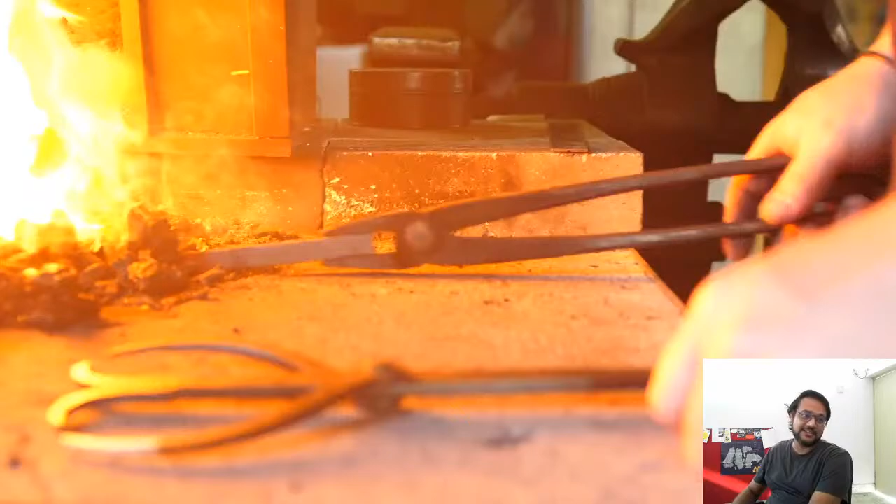I found this on Vimeo, and it's really interesting. I'll do some voiceover on top of this. It's really well shot, so I thought, why not show you guys and discuss it with you as the video is going on? This guy is making something quite interesting, and I think it will blow your minds by the end of the video. But take a look at how he does it. That's the important part from the perspective of this course.

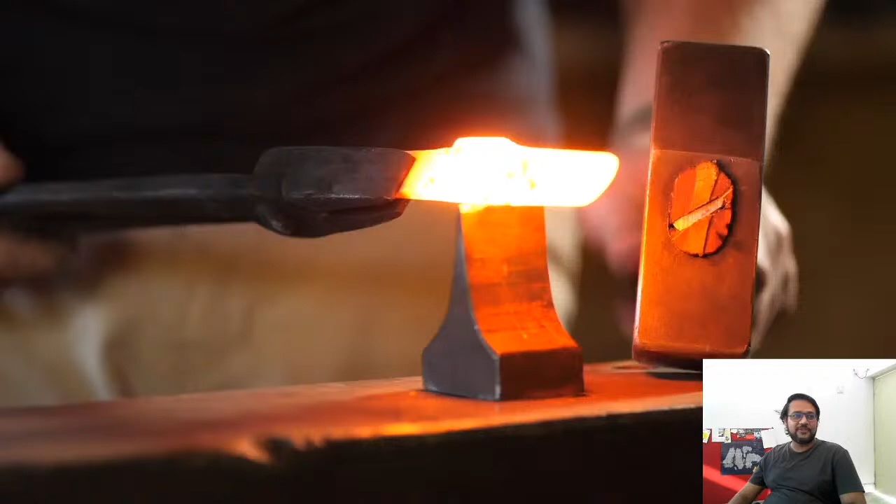So you see what happens when you heat metal? It gets red hot, and at portions where it is really hot, it gets almost white. He's working with steel mostly.

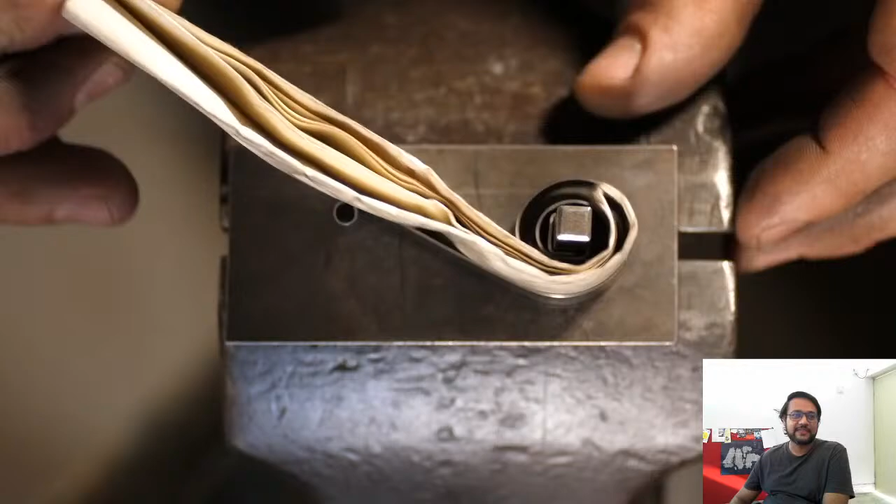So he's trying to make a spring. He's bent a piece of sheet metal, wrapped it in wire, coated it with a kind of chemical. I think it's borax. It's a kind of flux which prevents the metal from oxidizing too much. Okay.

Yeah, totally, Madhav, editing is amazing. I mean, it's edited to the music.

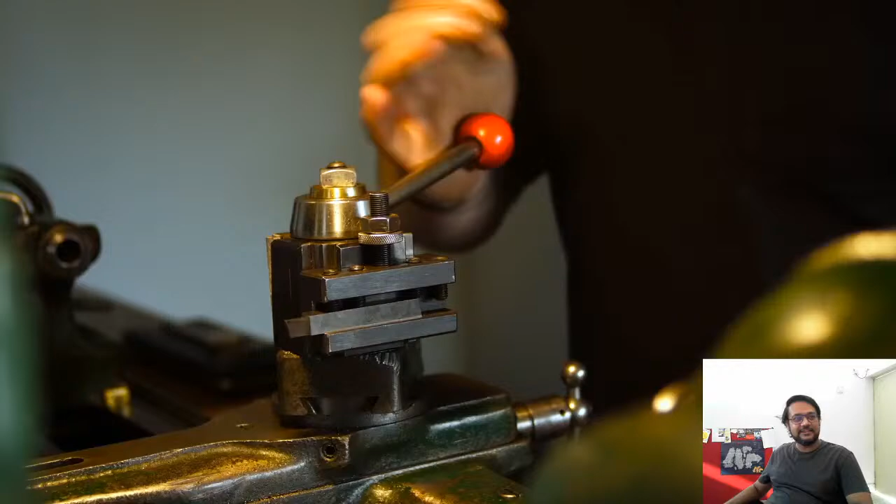You saw he dipped it in oil after he did that, and now he's taking it into the various machines and machining out some interesting shapes. The guy is so good that he's making his own screws. Can you tell me what this process is?

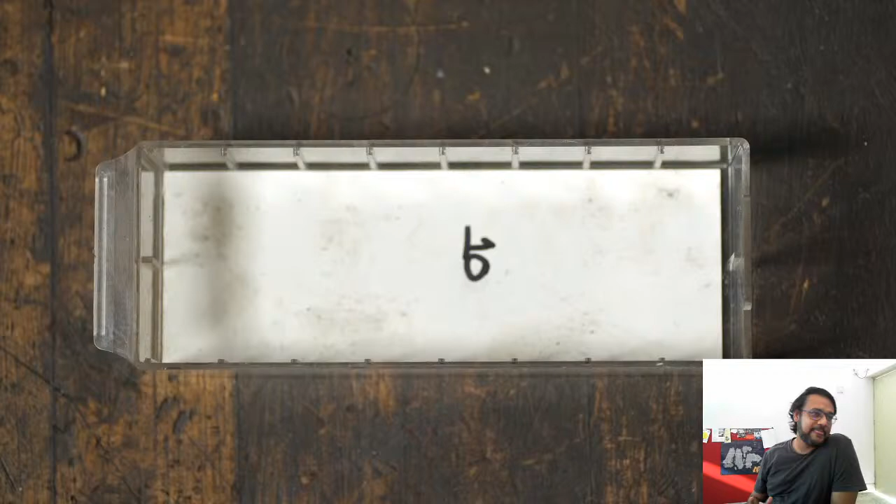Anirudh, we have a furnace, but it's not very high temperature. I think it goes to around 800 degrees or so. Okay.

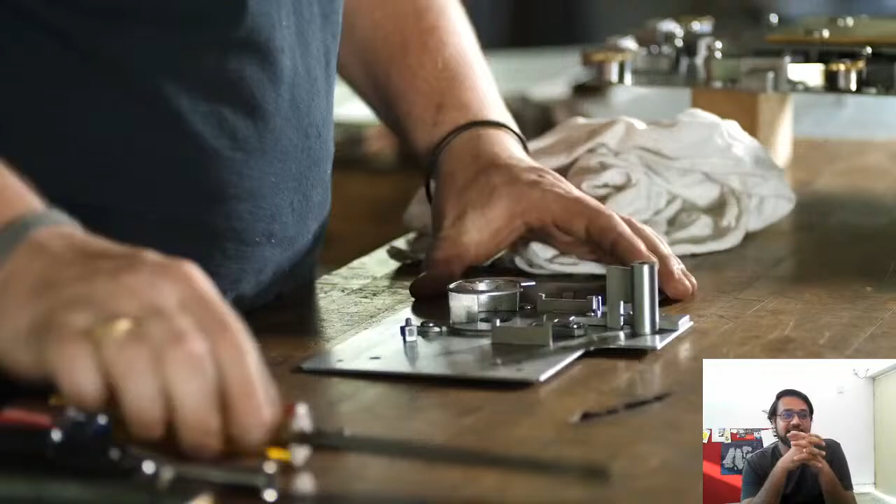Look at the details that he's getting out of these machines, and hammered forged parts. So the initial steps were forging. Okay. Yeah, Gaurav, you're right. It's called tapping. And once all of this is assembled, it just looks phenomenal.

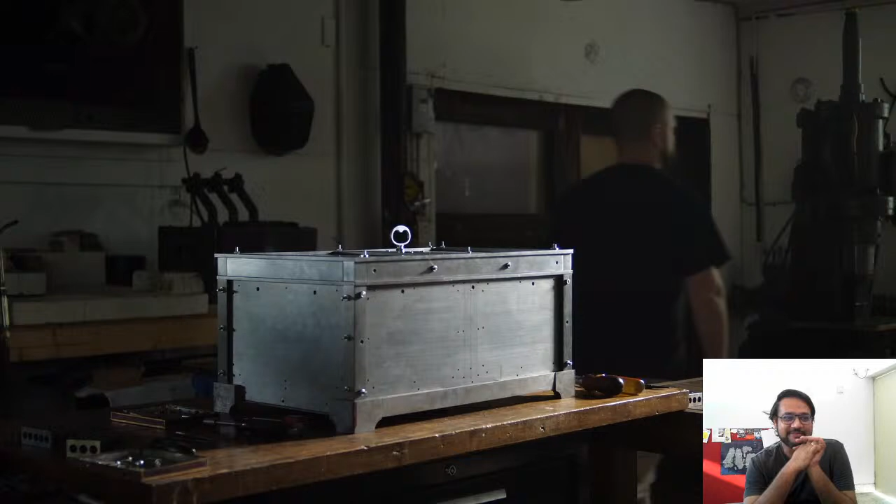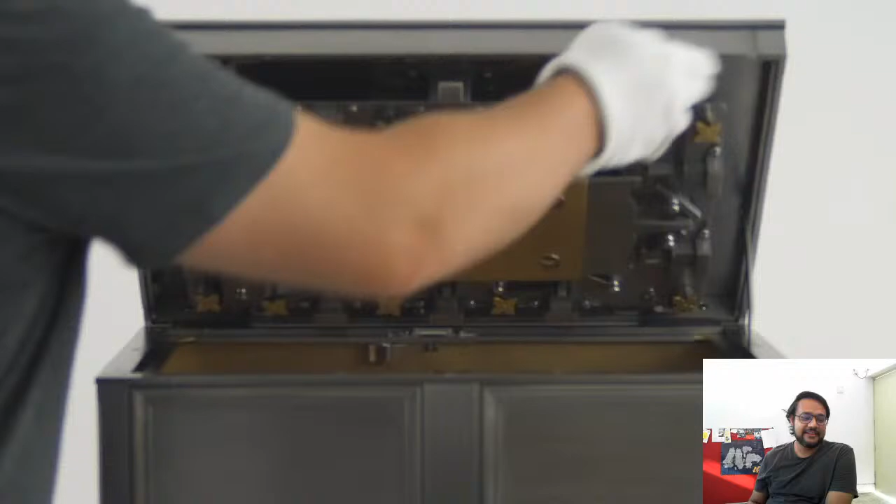But you see how it works. That's the best part of it. This is what he made. Just look at the keys that are there. I don't think anybody will be able to open it up just like that. Amazing, right?

I think it's by Seth Gould, and filmed by this guy, and it's a really well edited video. I hope somebody does not take it down. We'll see what happens if that is done.

Okay, so we will not play the next video, and let's go back to our classes. So you saw what happened in the video. He went through almost all of the machining processes that we discussed, except for casting. I don't think there was casting, but there were bits and pieces of a lot of these things. So if you analyze the video, you will find some interesting things to take away. I would urge you to go back and look at the video again piece by piece, and see what kind of details you can find.

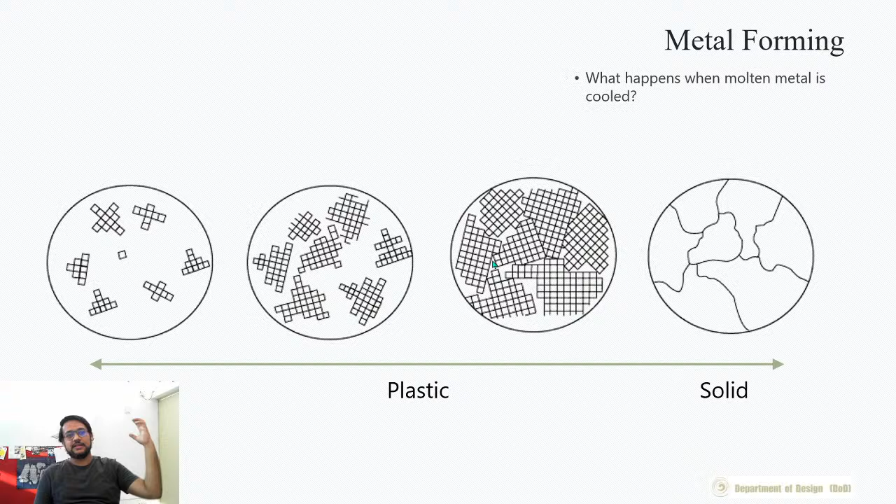Okay, so we'll start taking a look at these processes. So the third diagram over here, the third diagram that you see, these two are the phases in which we will see how metal is manipulated. Okay, so the topic that we are discussing is called metal forming, and the way you manipulate liquid material, mostly liquid metal, is through casting processes, and the way you manipulate metal when it is in a plastic state is called forging.

And you could use similar forging methods when the metal is at room temperature also, when it is not heated. So there are some forging processes, or should I say forming processes, which are done when the metal is solid. So we will take a look at some of these also, but the fundamental theory of manipulating metal when it is not in liquid state is fairly similar. Okay, so we'll start off by first looking at forging.

Okay, yeah, we discussed this chart. I think by mistake I put this over here. So this is how solidification of metal happens. I discussed this earlier, how when, let's say, you have a cube of liquid material, when it cools down, what happens to the grain structures depending on the rate at which it is cooling.

So if the rate of cooling is quite high, then it is losing a lot of temperature very quickly. Then chances are you will have this kind of a grain structure with a thin boundary around the object with smaller grains, because a larger amount of heat was released from that area very quickly, and the crystals did not get a chance to grow as much. However, as you go in, you will have these dendritic, columnar structures of grains pointing towards the center.

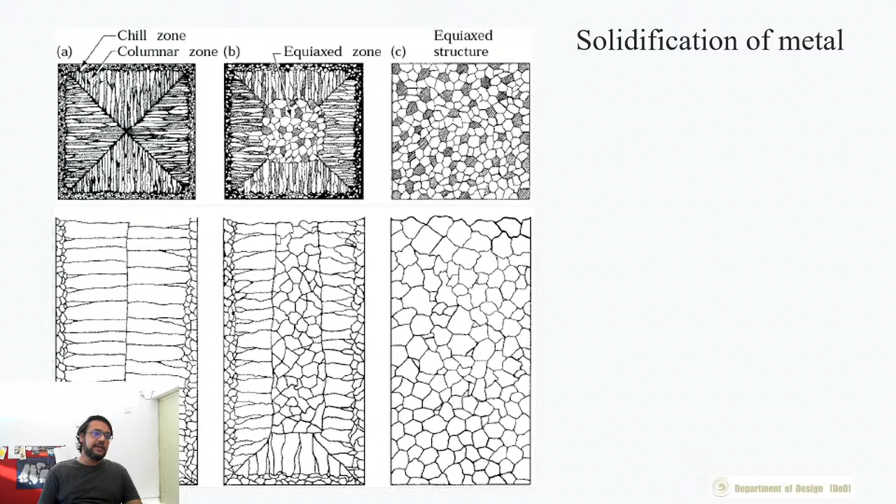Forging is a subtype of forming where you heat the material to a certain temperature where it is more malleable than when it is solid, and you apply force through various processes. You could just hammer it; what you saw in the video was hammer forging. You could do it at a larger scale. Of course, you need a much larger hammer, and you can have something like drop forging, where instead of multiple hits of a hammer, you have one very large, very heavy piece of material or die just falling onto the heated material and giving it a certain shape. So that is drop forging.

Press forging is, instead of dropping something on top of this heated material, you press it slowly so that it could take the shape. And swaging is a subtype of forging which is specifically related to pipes.

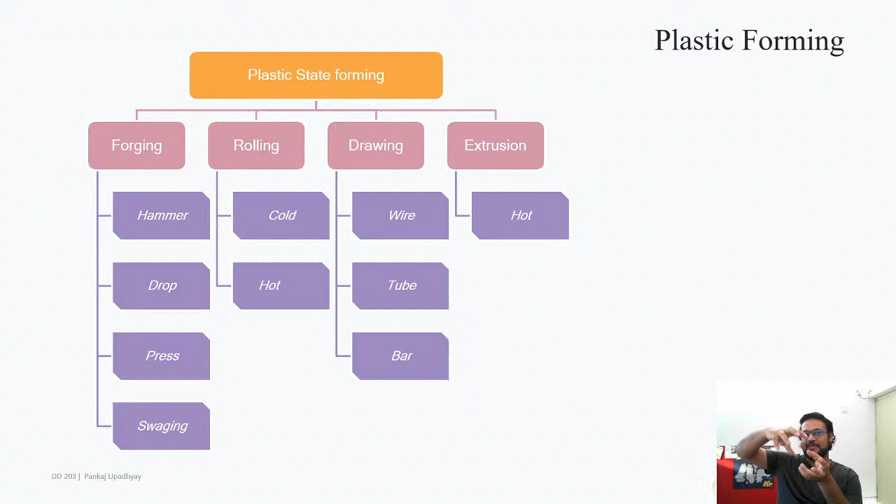And then there is something called an extrusion process, and this is again going back to our households. If you've seen any of your family members making bhujia at home, you would have this small container filled with batter, and there'll be small different shapes that you can put in towards the end, star shape or circular shape, and you'd press it, and the material would come out, right?

So and then that would be fried, right? So that is extrusion. So drawing is slightly different than extrusion, Fayaz. Drawing is where the thing that you want as the final output is pulled from a material. Extrusion is where what you want is pushed from the material. So there's a slight variation, and when you actually see the schematics of how these things are done, then you'll get a clearer understanding.

So this slide was just to give you a larger snapshot view of what exactly these forming processes entail, and all of these processes are done primarily considering the fact that metal is soft, it behaves like dough. Okay.

Devanshi's question is, how does cold rolling come under plastic forming? Well, see, here's how I will answer this. Metal is not a solid thing. Metal is actually soft. It depends on the force that you add. If you can apply very little force, then the material is hard. But let's say you have the ability to apply however much force you want, right?

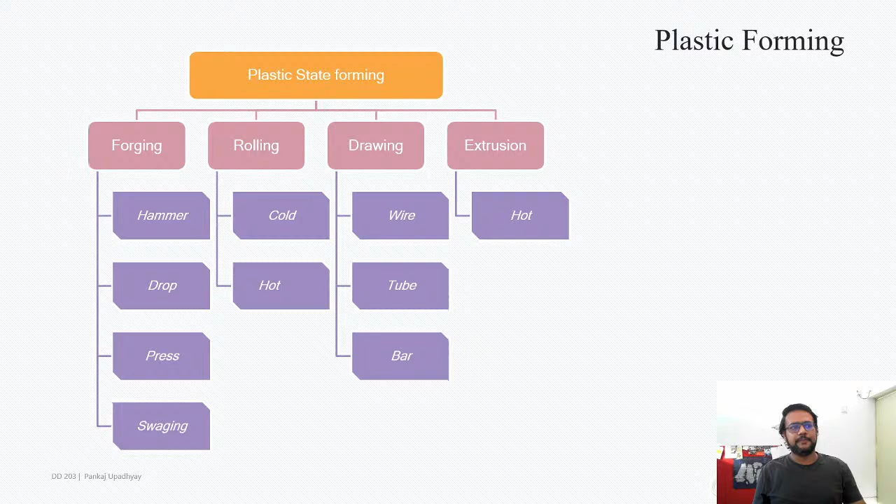So in cold rolling, the forces that you apply are much higher than hot rolling, but the process is exactly similar to a forming process. It is taking advantage of the fact that metal is actually a soft thing. I hope I've explained it in a very basic sense. That is why it's within this forming category, where you are actually forming the material. Okay, so let's go forward.

So this slide kind of gives you the answer, why do we need forming at all? What's the point of forming? You could do a lot of things. Let's say the person that you saw hammered things and got them into the shape that he wanted, right? What's the point in that? He could have just cut a piece into that shape. There will be some wastage, but why go through so much effort?

Why do you have so much respect? I mean, right. Anyway, sorry. Don't distract me.

Anyway, so casting, right? If you look at the grain structures of a casting inside a microscope, you would see grains arranged mostly uniformly, or towards the outer envelope you would have smaller grains, and towards the inner, like we saw, there may be an equiaxed structure. There's no particular direction to the orientation of the grain. They are just haphazardly arranged, more or less.

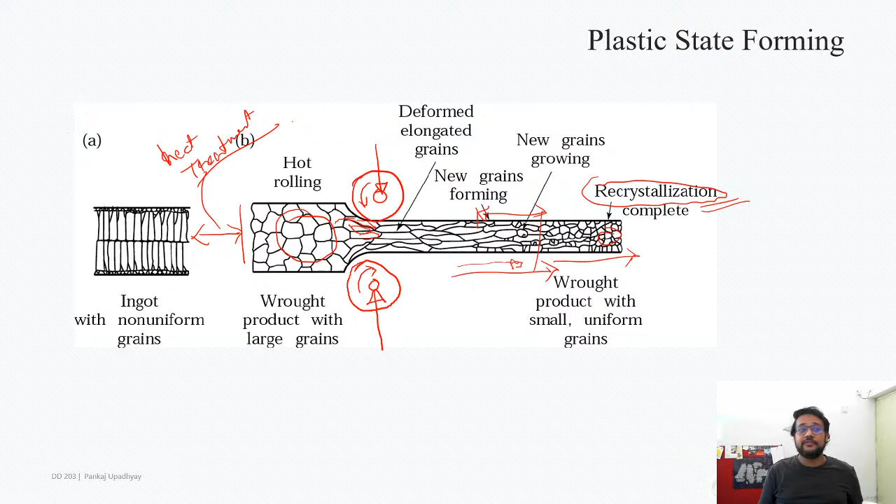And these two images show you two different versions of rolling - one is hot rolling, one is cold rolling. What happens naturally in hot rolling is that because the material is hot, the grains have slightly more ability to give way, or ability to break apart more easily. This one is a heated material.

It goes through the same kind of roller setup, and what happens is, newer grains are formed throughout the cross section of the material. In cold rolling on the other hand, because the material is cold and not heated to a certain temperature, the grains in the central portion of this don't get modified because of the applied force.

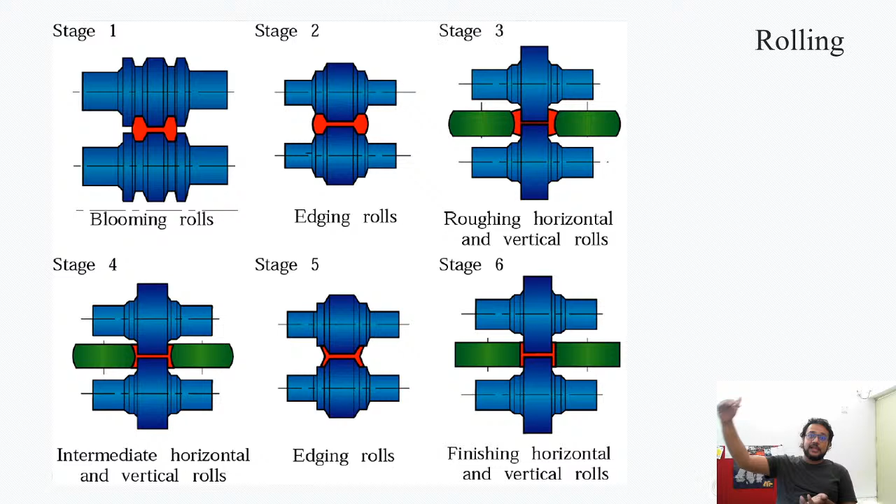You pass the billet through different sets of rollers, and subsequently in stages you get to this I shape, which has properties desirable for construction. For example, it has good resistance to bending moments, and because of the shape, the strength of that small piece of material, which doesn't take too much material, is much higher than a solid piece. It's a good trade-off between lowering the amount of material and the strength that is required. That's why I-beams are really essential for construction.

This shows how I-beams are made. You take a billet, run it through a first stage roller where this shape is achieved, then it's pressed, then you have side rollers which pinch in the material in subsequent stages. You get something like this, and finally a flat set of rollers gives it this I kind of shape. I should have a photograph of an I-beam on the side, maybe next year.

What are the advantages of a uniform grain structure, compared to a non-uniform one? Comparing cold rolled and hot rolled steel, a uniform grain structure ensures that the material properties are non-anisotropic — the strength does not vary across cross sections. That is the advantage of hot rolled material. Whereas with cold rolled, it's not important to have non-anisotropic properties; you can have variations laterally, but in the axial direction you need really good strength. Or maybe it's the other way around — in the cross section you need uniform strength, and if it varies slightly it's okay. So it's a trade-off, and naturally uniform grain structures would have a slightly better property.

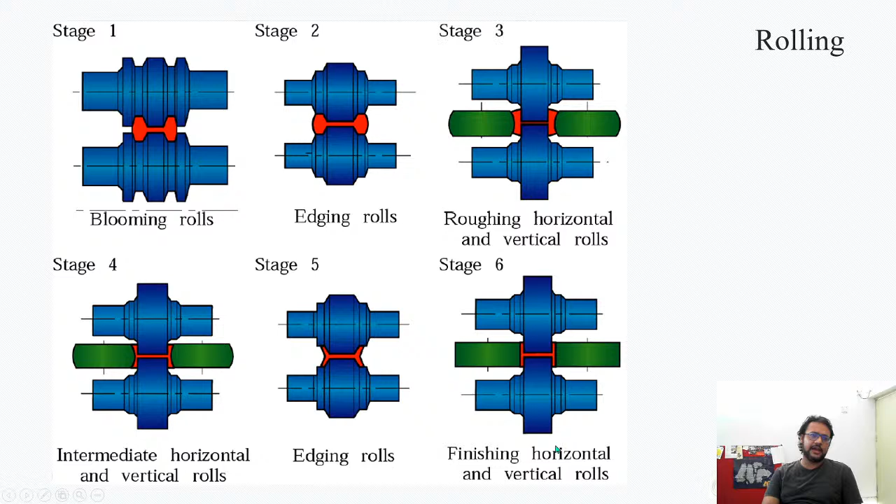Devanshi is saying train bogie floors are made with I-beams. I think so — I can't tell you for sure, but yeah, maybe.

The next question is, how do you make a pipe? You can make a pipe using forging methods. Here's an example: if you take a cylinder of solid Play-Doh and roll it between two surfaces, you'll see that internally a slight cavity starts to form. Let me just draw it again to show this.

So what happens if I take a cylindrical Play-Doh piece and roll it between two surfaces? If you move this forward and back, instead of a straight cross section, this thing becomes very jittery, and you get a kind of cavity forming on this side. Let me sketch this out.

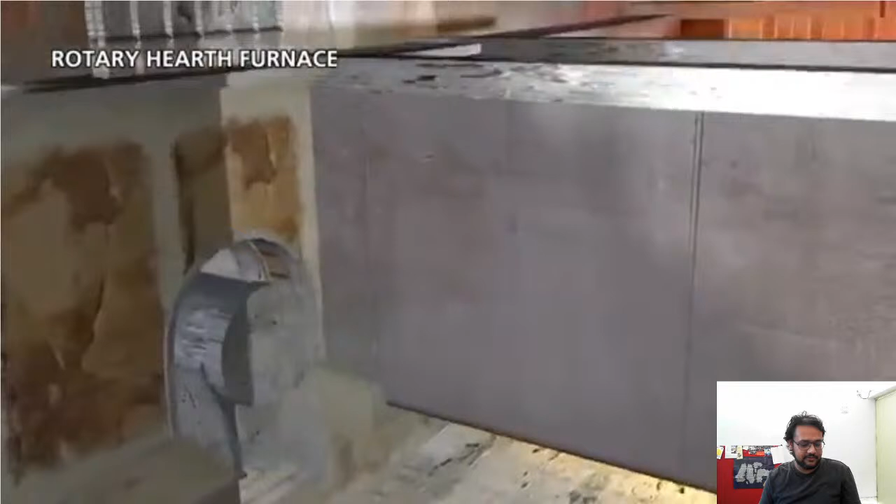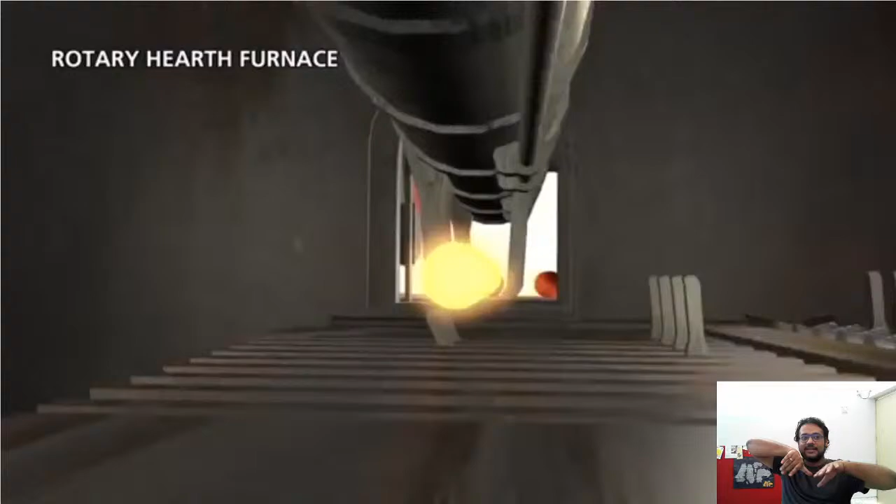Okay, let's start off from here. So this animation shows you the whole process of forming. You have a solid piece of steel, and this is all mechanized - there's a very large furnace called a rotary hearth furnace. Material is put in from one end and it goes around, and by the time it comes to the same place, it's white hot.

So this is the rotary hearth furnace. From one end to the other, the material is heated, and this is transferred through these arrangements to a place where rollers press the material. This is what the diagram was trying to show - it presses the material, and what you have is a separate piece called a mandrel, which pierces the material and goes through subsequent rollers, with the mandrel inside the pipe itself.

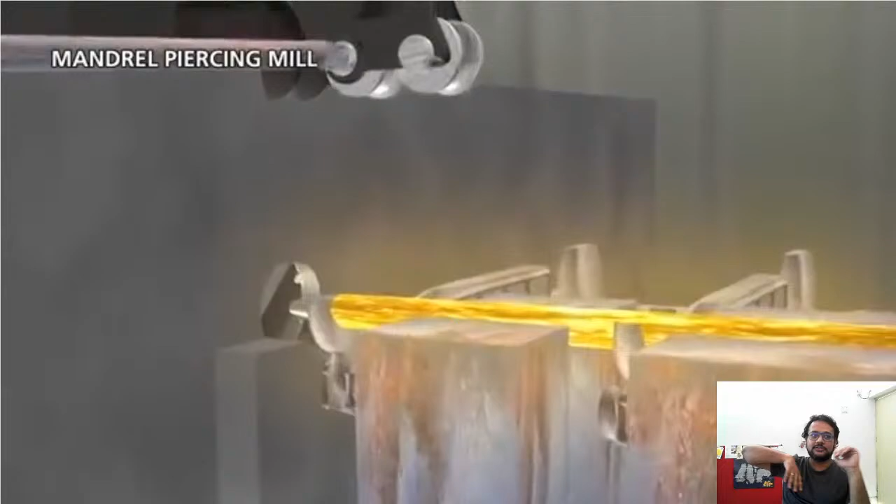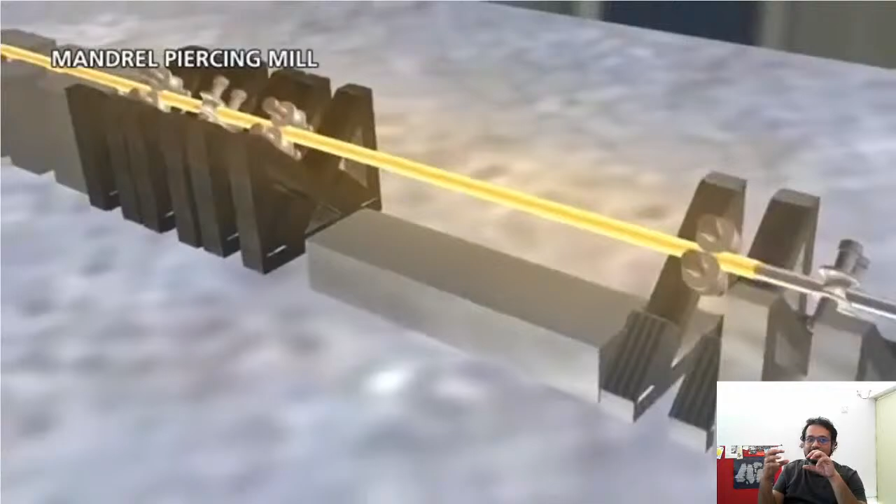Along with the pipe you have the mandrel. Now the mandrel is removed by the next set of rollers, and you have arrangements where it is quenched - liquid or water vapor is poured onto the material to control its temperature - and slowly through these rollers it comes out, gets pressed, and the mandrel is removed from the other end. Now the pipe is essentially ready, and subsequent rollers in a certain arrangement take down the diameter of the pipe in stages.

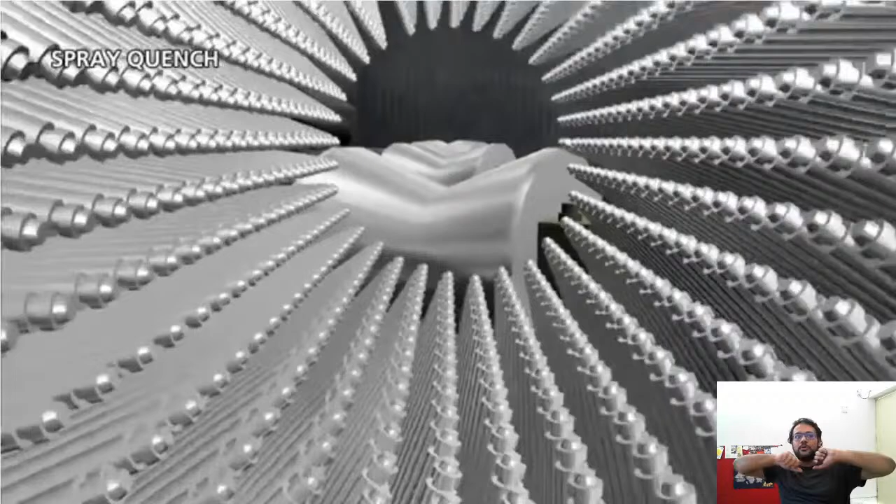This is a very nicely done animation, and it shows you the details. Now it's just a matter of elongating the pipe to whatever diameter or length you want. And this one is a quenching setup, a spray quench.

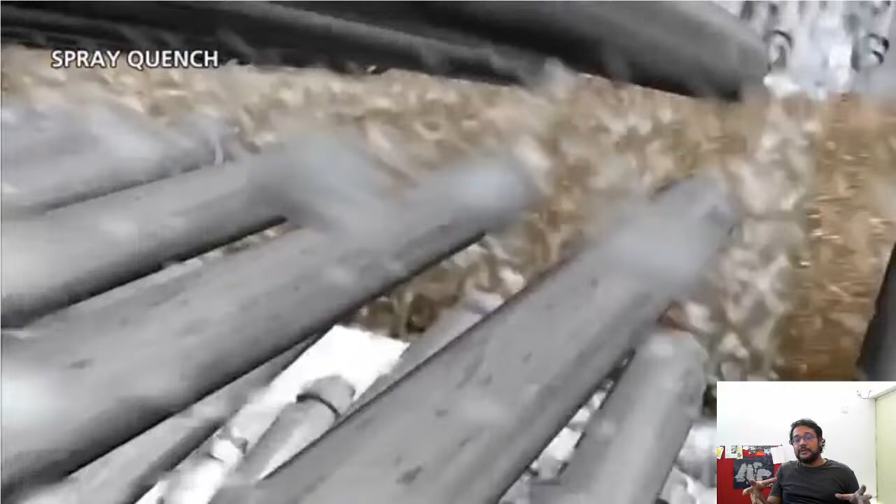Water is poured onto the surface to harden it. This makes it really hard, but it also makes it very brittle. This quickly cools down the material, so you can imagine whatever shape the grains were in at the center of the object.

Let's go forward and see what we have here. This one, I think, is the same thing but in the real world - this is how the rolling industry works. You see huge machines just making pipes; the whole industry just makes pipes. So you have these billets, and this is the rotary hearth furnace. Oh wait, just wait, let me.

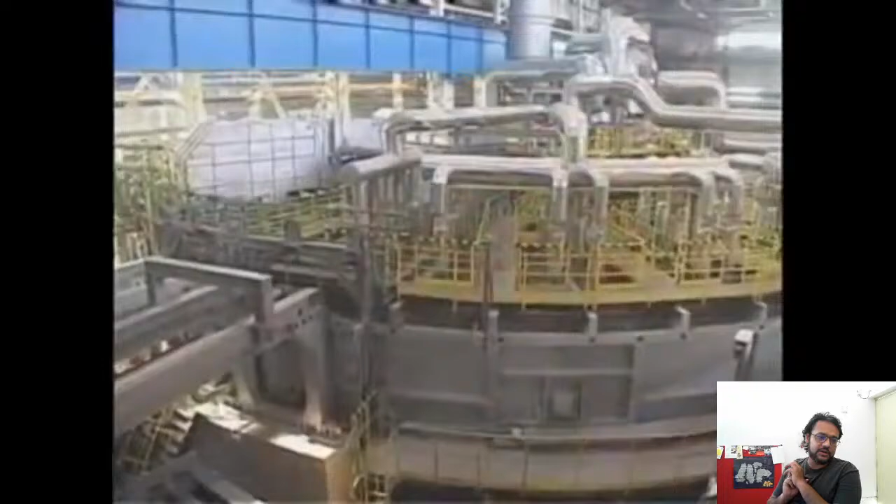Okay. So these are the billets that are there. Chaitanya is asking what difference do we see when we put hot steel in oil and in water. It's not much difference. Both of the processes are quenching processes. The reason you use oil is because it doesn't release so much fumes or vapor, and it can absorb a larger amount of heat before boiling off.

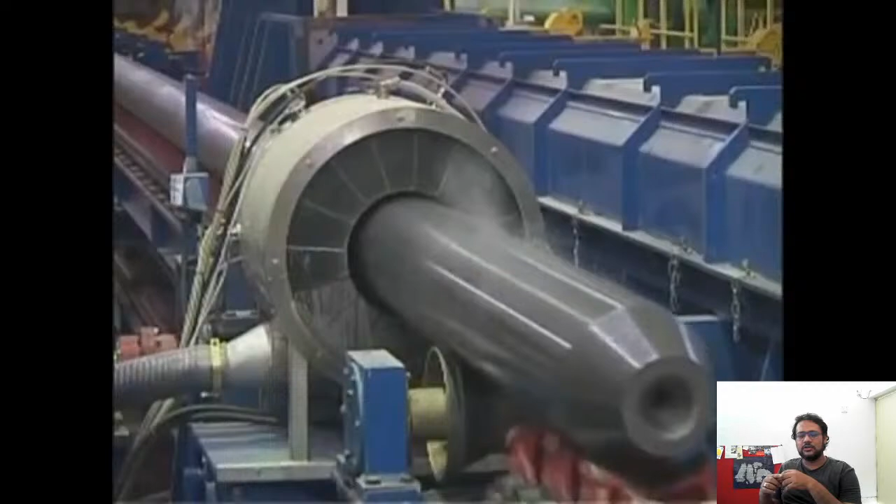Whereas water, as soon as it hits 100 degrees it boils off. And there's also this whole thing called the Leidenfrost effect. Which is basically water vapor forms like an insulating layer, which prevents the liquid phase water touching the hot surface. So that reduces the performance of quenching. Yeah. So those kind of things.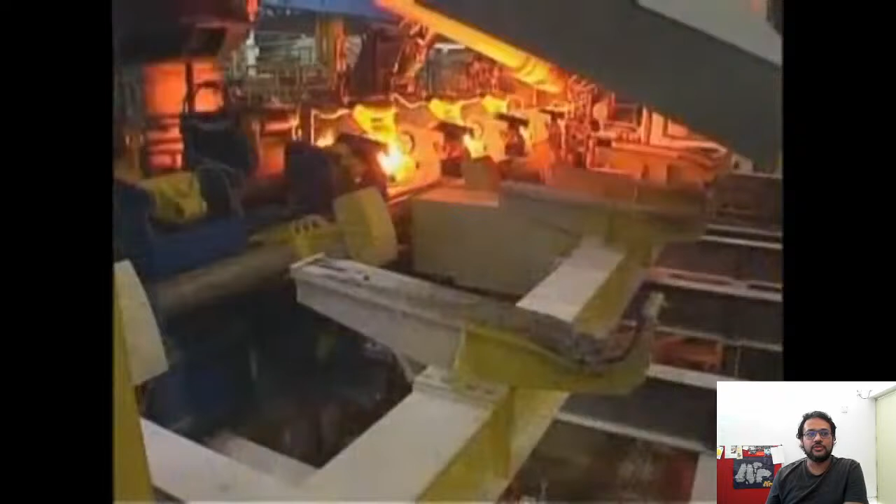Yeah, so this is the same thing, but shown actually what happens in the actual setup. Anyway, we'll not take a look at this. Let's move forward. There are other ways of making pipes also, and this is one of the ways which uses liquid material. This is a casting process and not a forging process, but just for you to have an understanding how you would make seamless pipes, right?

So this is a process where liquid material is poured onto a rotating substrate. And as it rotates, liquid material is poured, and that deposits and cools down on top of the substrate, and you remove the substrate after it's done, and you have this kind of a pipe. Okay.

Manu is asking, is that why water is sprayed rather than just dumping into water? I'm not sure. I'm not sure if the Leidenfrost effect explains that thing. I'm not sure. Okay. Maybe.

Okay. Anyway, so let's move on to other kinds of forging process. So that was rolling. Rolling gave you an idea about the internal structure. So that explains why forging is important, right? The process of forging changes the grain structure in a manner which is beneficial to us. It increases the strength properties of the same kind of piece, right? So that explains that.

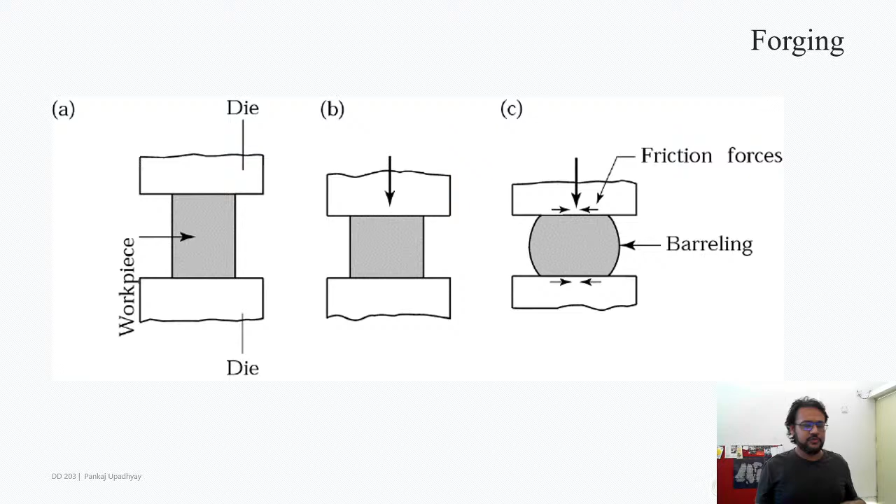So this slide shows you something called die forging, where you have a top die and a bottom die. The bottom die is held securely, and the top die, let's say, moves, and you have the blank, which is maybe a square or a cylindrical piece, heated to a red hot temperature. When I say red hot temperatures, it's something above 1100 degrees or something like that, okay? So you heat it to that temperature, and then you press the whole thing with a certain amount of force, and it takes the shape of the die cavity, okay?

So there are some thumb rules that are very essential when you, let's say, think about designing for forging. First, naturally this is a very crude method, you can't get very fine details with it, okay? So you should always have large fillets and radii for the forged part, and there are some tolerances that should be considered.

For example, when you press, some amount of wear happens to the die. The die doesn't last forever, so with subsequent pressing, you can imagine this is red hot steel, and that is some, let's say, tool steel, and if you keep on pressing, because of the forces, some amount of wear and tear happens to the die. So you need to consider all of that, okay?

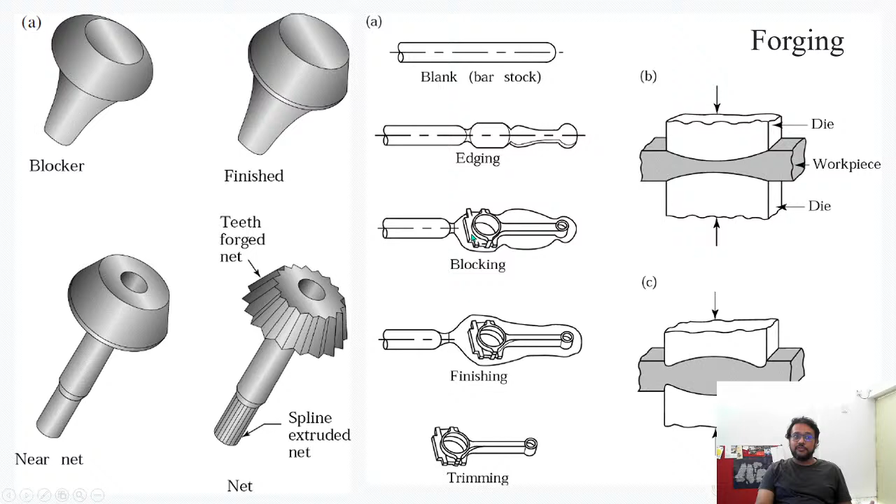So naturally here, if you have noticed, it's very difficult to get undercuts. If the object is not designed so that it can easily be encased in a die with a top cavity and a bottom cavity, it becomes difficult. For example, if this piece had a small hole on this square kind of place, then it would be slightly difficult to do it. That would be an undercut.

Many industrial machines contain steel parts that have to withstand great stress. The metalworking method that produces the strongest steel parts is forging, heating the metal, then forming it to the required size and shape.

Give me a second. Give me a second. Yeah.

Steel forgings are made from scrap iron, pieces of used iron recovered from demolished buildings and old cars. So this one gives you an example where scrap iron is recycled into making these forging parts. It's lifted up by large magnets, a large electromagnet which pulls up metal, as well as bits of new iron left over from the manufacture of iron products.

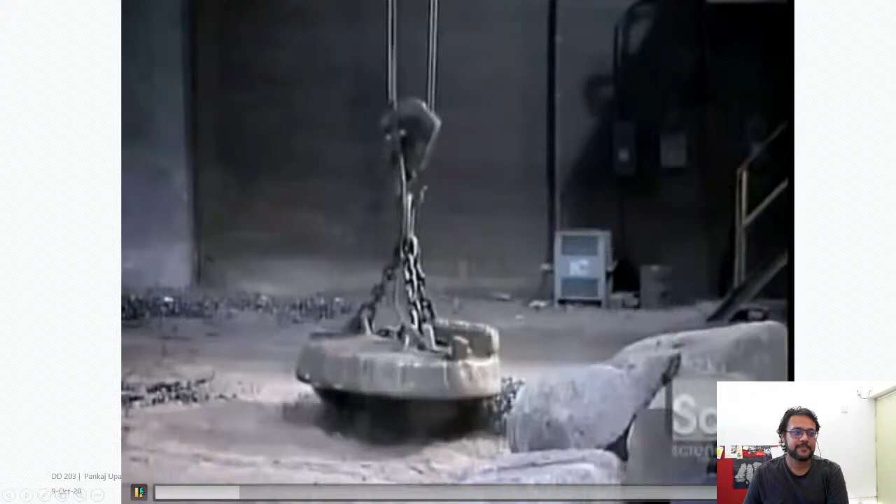And typically, this is done in recycling industries where you would take some parts of recycled material and some parts of, I should say, virgin material, and you mix it together. Sorry.

Pieces of used iron recovered from demolished buildings and old cars, as well as bits of new iron left over from the manufacture of iron products. Forge workers maneuver a gigantic magnet to lift almost 6 tons of scrap at a time, until they fill a 28-ton scrap bucket. They load 2 such loads into a fiery furnace whose temperature peaks at 3,000 degrees Fahrenheit.

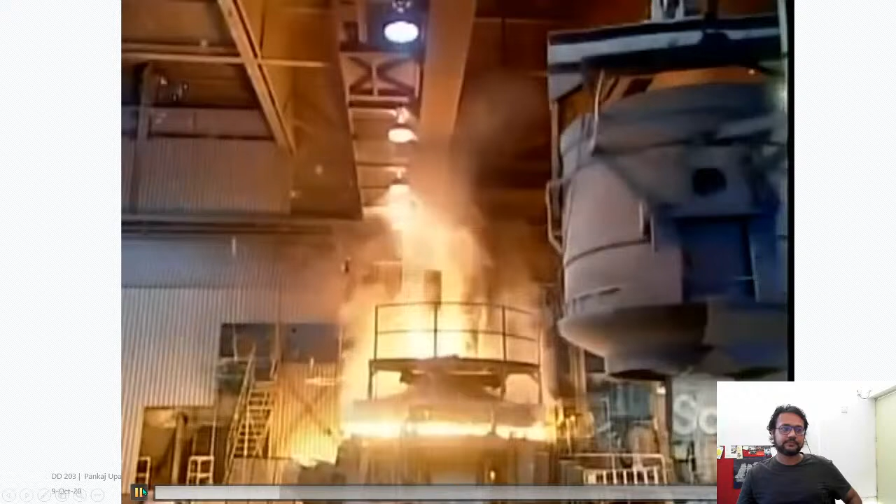So this one probably is a steel furnace. That's why the 3,000 degrees Fahrenheit. I think it's around 1900 or 2000 degrees centigrade, something like that. Or is it around 1700? Anyway, I can't convert just like that. This is called an electric arc furnace because the heat is created by a strong electric current running in an arc between 3 electrodes. So all of this scrap is dumped into that.

Subgrades of steel are produced by adding specific metals or non-metallic chemical elements such as aluminum, nickel, chromium, vanadium, manganese, carbon, and molybdenum.

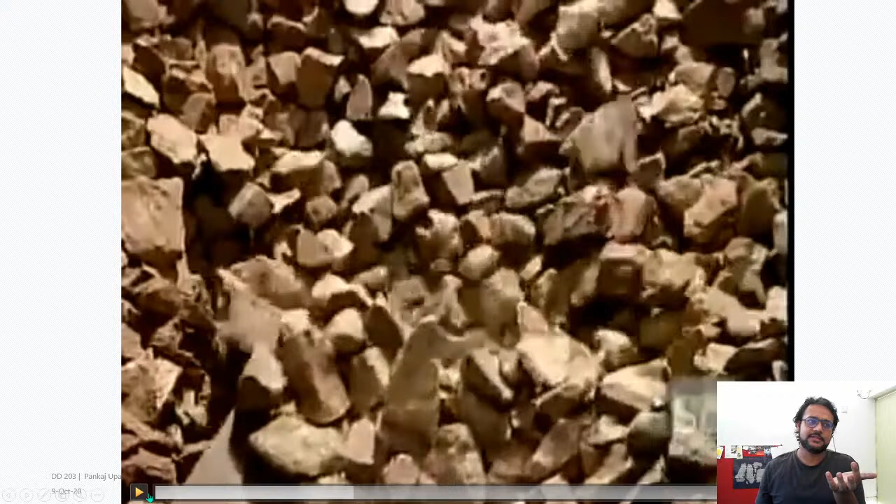So you saw these. Typically when you get this kind of iron, you melt it, and when it is in the furnace, you measure and add these different elements into the mix. Everything melts and boils together. It's almost like cooking. When it cools down, the alloying of the whole thing happens. So this is how alloys are created. It looks like a very simple straightforward process, but it's obviously not. There's a lot of control and process parameters that you need to monitor.

They also add the mineral fluorite to help fuse the metals, some of which are in the form of blocks called ingots. Throughout the 3.5-hour meltdown, they test and adjust the chemical composition, to attain the lowest hydrogen, oxygen, nitrogen, and sulfur levels.

So the reason he's saying that nitrogen, sulfur, all of this is reduced is because these elements typically are the impurities in molten material, and either they can get into the product itself and make it undesirable, or they can form a layer on top which is called slag.

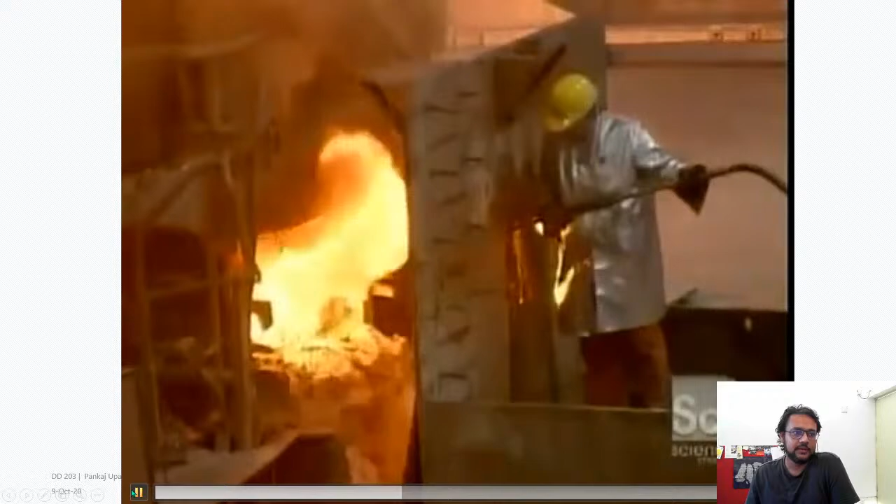Key to producing strong, high-quality steel. Then they pour the sizzling molten metal into a 50-ton ladle that's lined with heat-resistant brick. So what he said, this is poured into a ladle which is lined with heat-resistant brick. Heat-resistant brick are these refractory materials, so things like ceramic, or in the category of ceramic. So this one is lined with those materials so that it can hold the metal, right?

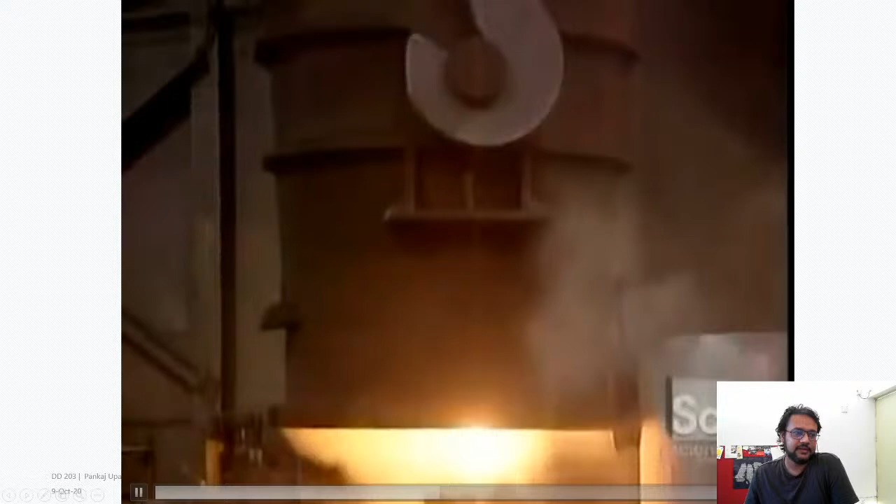They add aluminum and lime to chemically counteract oxidation, rusting caused by air exposure. Now they cast an ingot, a block of steel that they'll shape into a forging. So from here it's casting, right? But you are not casting the product. You are casting a piece from where you would start forming and forging the part. A block of steel that they'll shape into a forging.

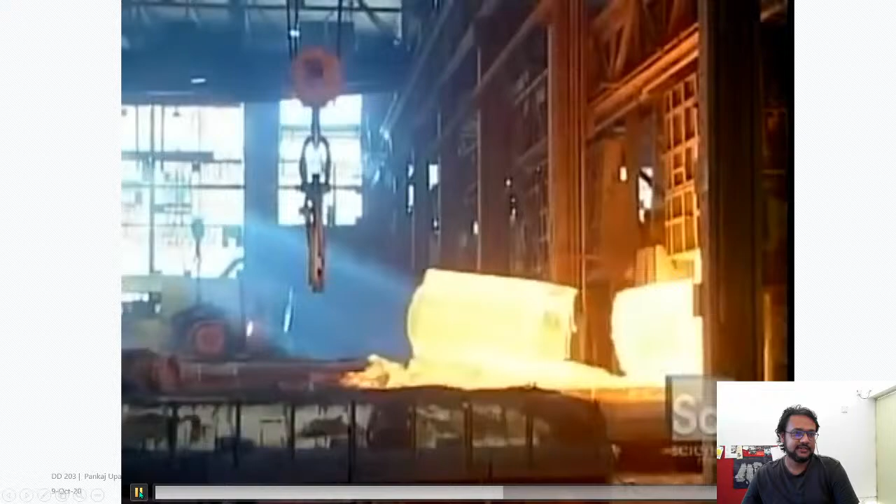The molten metal flows out the bottom of the ladle into a mold below. This bottom pouring, as it's called, makes for a smoother casting because liquid flowing upward doesn't swirl around as much as liquid poured downward. This forge can cast ingots weighing up to 46 tons. Just look at the size of these things. The ingot solidifies, and they turn the mold upside down to extract it.

I just want to do a side note, and I want you to appreciate the design of this jaw. It is so simple, but look at it, it's so effective. The force of holding this object is coming from just the lifting force. So you have this one lifting point, and these are two arms. There's three pivots: pivot 1, pivot 2, and pivot 3. And when you lift it from here, these pull from both sides and it presses on this side.

So all you need to do is drop the jaw onto the object in an open configuration, and when you pull it, it automatically clamps onto the object and lifts it up. So yeah, side note.

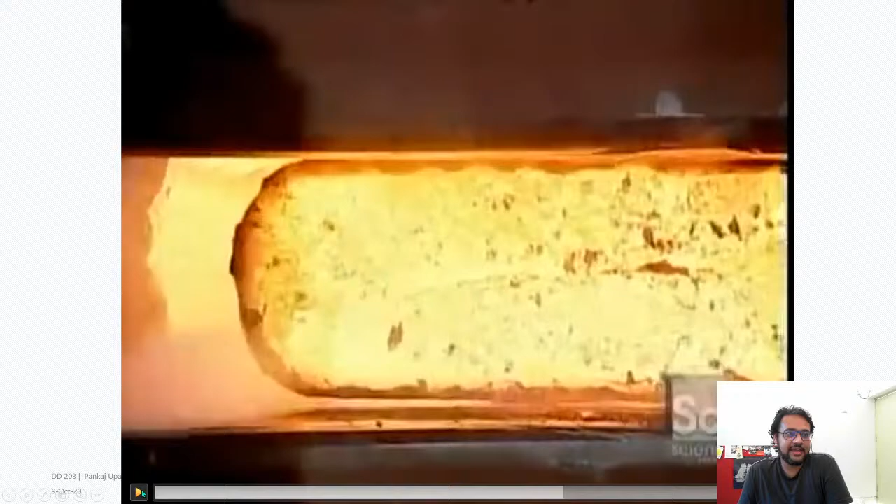Then, over 12 hours, they reheat the ingot to 2200 degrees Fahrenheit. This makes it soft enough to hammer or press into shape. So now it will be pressed, and I want you to notice something. They use a machine called a forging press, mounted inside a forming die or a pair of dies, depending on the technique. The press applies thousands of tons of pressure, crushing the ingot and forcing it against the die. Did you see it? The steel is quickly oxidized. I'm sorry.

The steel is quickly oxidizing. So this is a layer of oxidization that deposits on the material, but you can see how the grains are flowing inside this because of the pressing, right? You can see that there's a direction to the whole grains flowing. So it's going like this, this part is going like this, and there's a small cavity which is forming. With all this air exposure, they use a high-pressure water gun to remove the scales of rust.

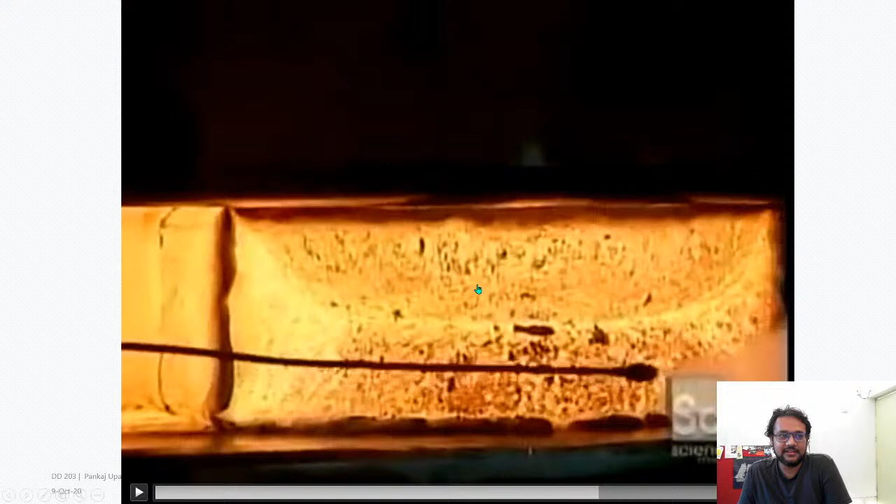Sorry again. So you see here the orientation in which the grains get arranged in such a part. When you're forging, this is how the microstructure inside will look. An ingot often passes through a die several times or through a series of dies arranged in sequence. Each pressing forms the metal bit by bit into the final shape.

Metal is composed of microscopic crystals. Squeezing it in a press bends these crystals, destabilizing the metal structure. But reheating the metal creates new crystals to replace the deformed ones. This restabilizes the structure, and because the new crystals are smaller, makes the metal stronger than before. Basically, what I said in the past hour in one statement.

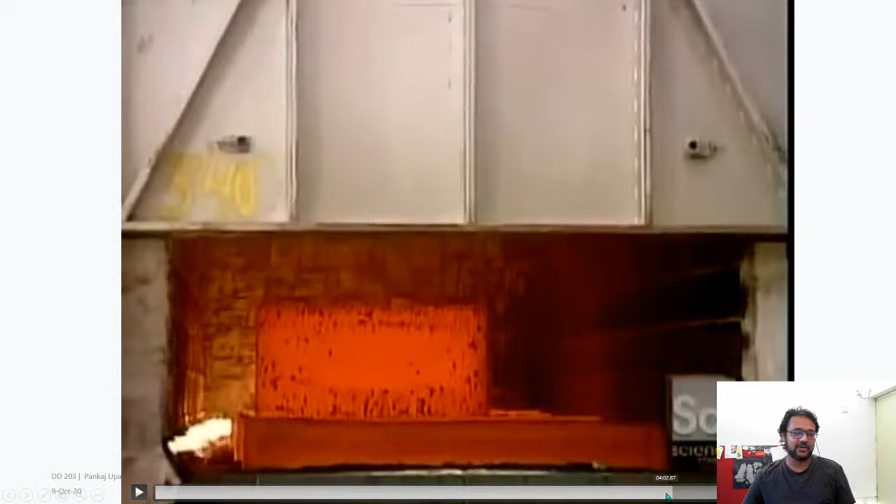Oh my God, I'm sorry. Makes the metal stronger than before. That's why finished forgings require heat treatment. What is happening? I'm sorry for the technical glitches. Makes the metal stronger than before.

That's why finished forgings require heat treatment in what's called an annealing furnace. They heat for a day or two depending on the grade of steel. Then they soak in a water and chemical bath for about 5 hours. So this is the quenching process. It strengthens the steel even more. Okay, it hardens the outer layer of the material.

Finally, workers mount the steel forgings on lathes. Look at the size of that lathe. They remove the rust scales that form during heat treatment, then precision machine the forgings into what the client ordered, usually industrial parts such as rotors, spindles, and shafts. Many factories prefer to buy forgings in the shape of blocks or bars and machine the parts themselves.

So that's how forging to get to a block shape is done, right? But let's take a look at how forging is done for a product, a combination wrench. Okay, so this is the product. Wrenches are typically made with forging, so let's take a look at that. It tightens and loosens bolts using its U-shaped open end or its enclosed box.

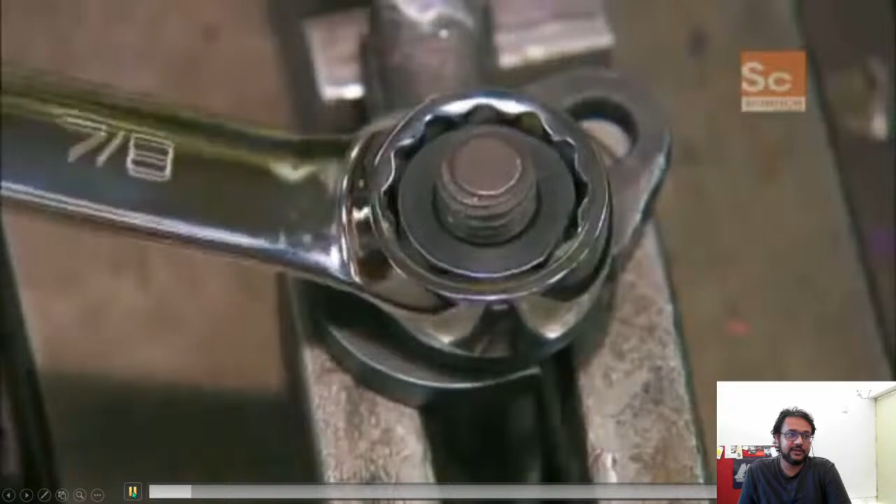So there are some other machining processes also that you will see here. One is called broaching, so notice it carefully and keep an eye out for it, with a hexagonal shape. To start, a steel bar travels into a die cutting machine that cuts it into lengths called billets. Yeah, so these are billets. Billets are the starting point for the forging.

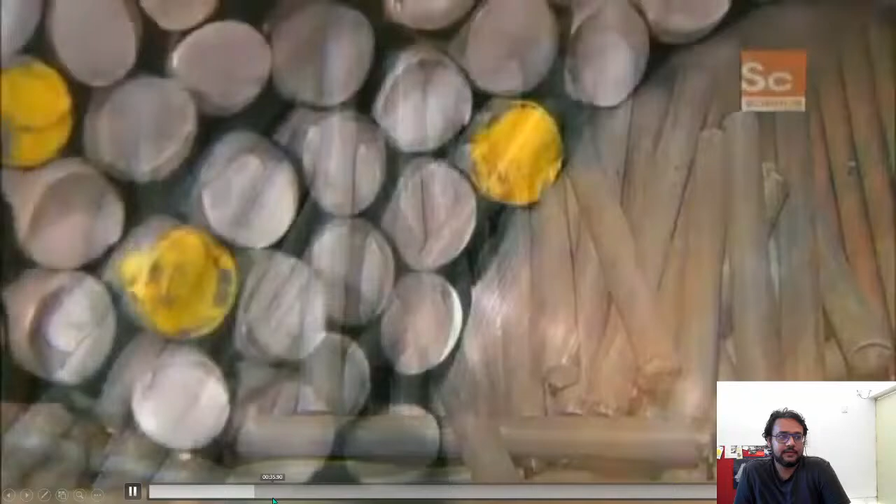One by one, a machine feeds the billets into an induction heater. It heats them to more than 1800 degrees Fahrenheit. Typically induction heaters are used nowadays because other kinds of heating methods are fairly inefficient, but electrical heating is still the most efficient process. Then it sends them into a forging press. So this is where the forging operation starts.

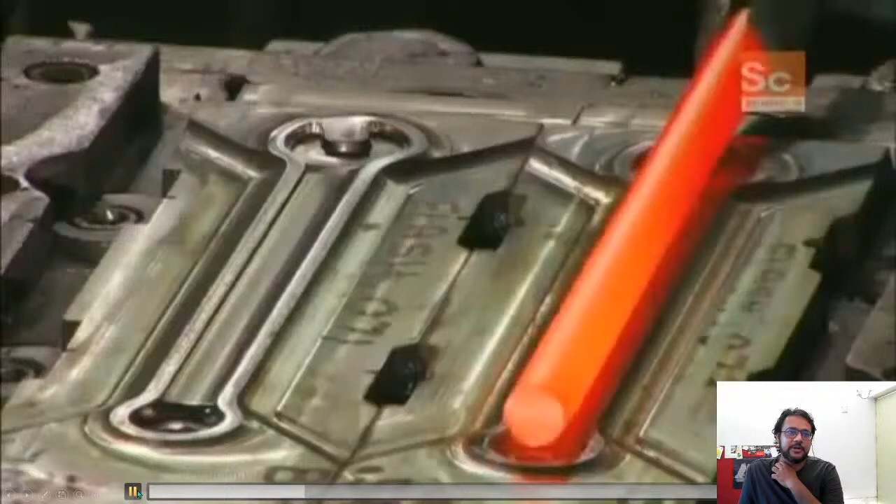The first step gives the wrench its general shape, but you can see that the dies are kept side by side, and the work is actually done by a single person. He holds the billet, the first operation happens, and it's taken to the second step, which gives it its finished shape, and the third one cuts off the excess metal. So again, this part is recycled, and this is what you get out.

The wrenches exit the forge press and cool off on their way into a collection box. So here you can see it's not yet finished, right? You can still see the lines where the two dies met. Even after cutting, you'll still have some amount of flash, the hole is not yet made, and it's a fairly crude process.

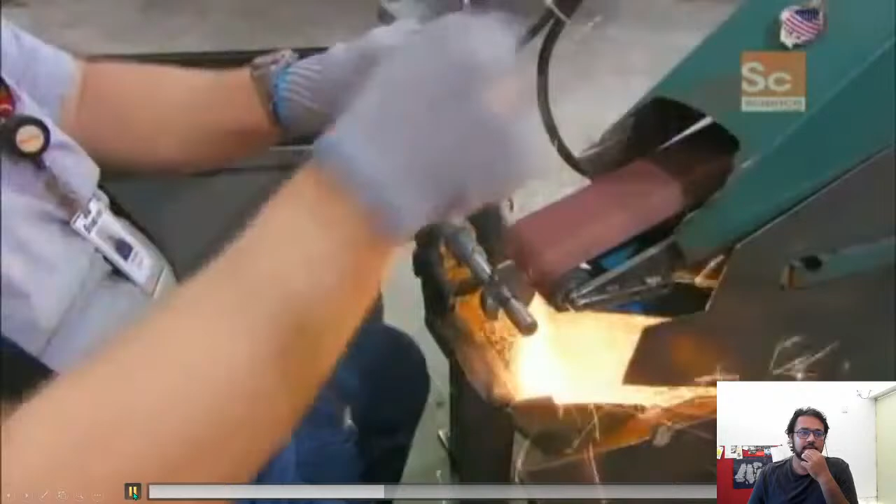Since the metal is taken to a red hot temperature and cooled down, there is some scaling which happens, like rust scaling. Those things need to be finished off in further operations. Then a worker grinds off the trim line, a thin line of excess metal created when the top and bottom dies come together. Here they are calling it trim line, but flash or parting line, all of these are valid terminologies.

This bend machine gives the box end a 15-degree angle. A vertical milling machine then drills a hole into the box end. So the first step is to remove the material which is not needed, and then give it the actual star form, using coolant to keep the drill from overheating.

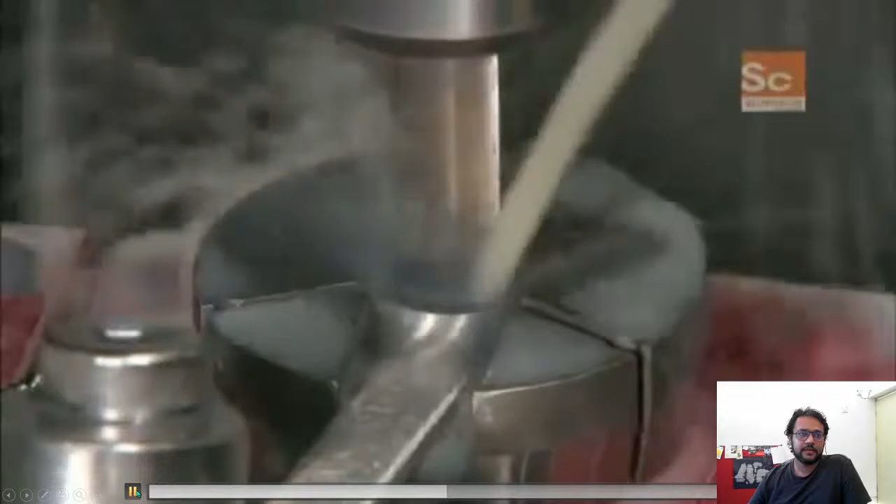This is a hydraulic hex broach machine. Broaching is this operation, so just take a look at this. The broach tool is what gives the hole a hexagonal shape. So this is the broaching operation. You get a near net part, and then you cut off these small portions to get whatever desired shape you want.

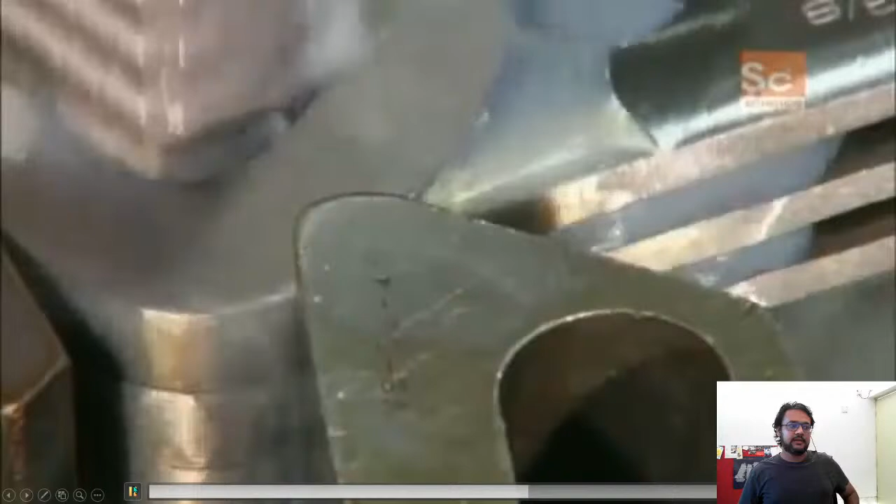Open-end wrenches also go through a broaching operation. In this case, the broach tool shapes the open end into the desired size. So here, as you can see, this is the broach tool. It just moves up and down, and the cutting blades are arranged sequentially one after the other in slightly incremental dimensions of removing material.

So it's almost done. The wrenches now undergo a three-stage procedure to harden and strengthen the metal. Because of the forging operation, it has imparted the necessary smaller grains in the whole piece, but there are still some internal stresses. To remove these, you take it through the heat treatment process, which rearranges the crystals. They are smaller than before, but rearranged, and internal stresses in the grains are removed.

Ceramic stones and a chemical solution polish the wrenches. This is how it's polished actually in the industry. These are ceramic stone polishing stones, and you have this tumbler which moves on. Sometimes a drum is also used, and you put whatever material is needed in it, and this will rotate and polish over time.

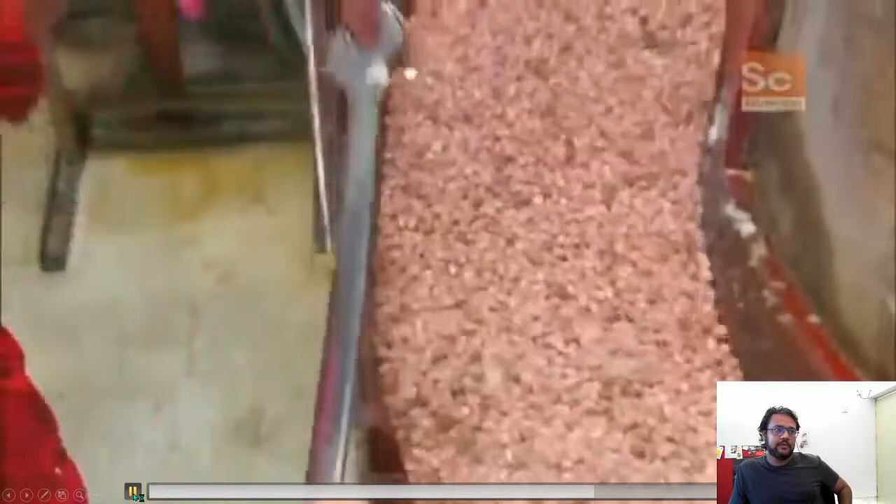A machine then dips the wrenches into a nickel plating solution that helps make them corrosion resistant. A series of baths then plate the wrenches with trivalent chrome, which is a safer, more environmentally friendly alternative to traditional plating methods. So that's how chrome plating is done. After a final rinse in water, the wrenches come out with a bright cosmetic finish.

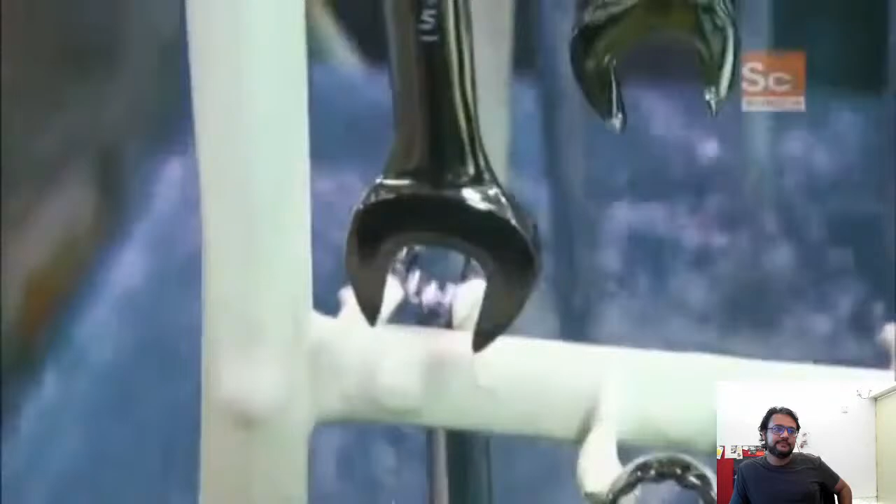Combination wrenches are available in a variety of sets, all conveniently organized and neatly stored. So that's how wrenches are done.

I don't know what this is, but let me just see. It spends up to 30 hours in a furnace to soften it enough to be worked and remove any rough edges. Anyway, I think this video is there, so go ahead and watch it. It's the same kind of thing like forging. It will give you a better understanding of the process, and this is an example of how tuning forks are made. I just found it interesting and put it here.

Tuning forks are also forged because they can't be directly machined - you need certain acoustic qualities in tuning forks. So they need to be forged because you want to arrange the grain structures in a certain manner.

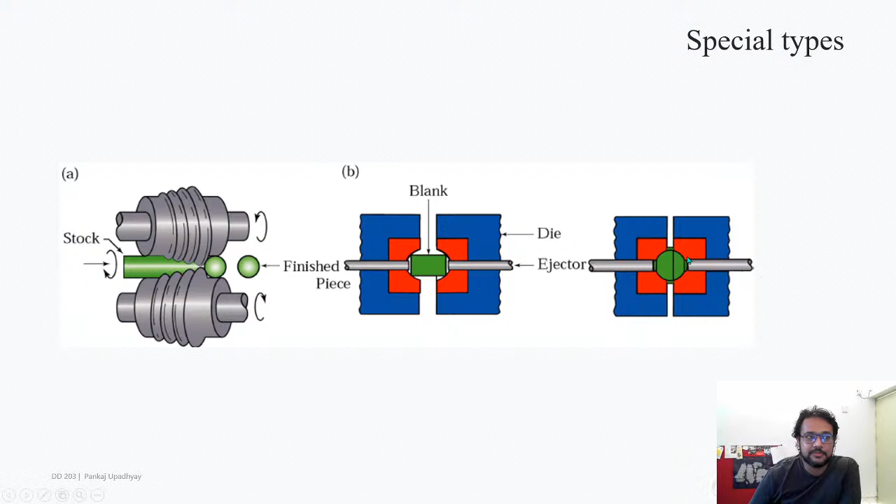Ball bearings can also be formed and made. You could design the rollers in a certain manner so that it pinches the material as it rotates, and you can make ball bearings that way. You can also directly make ball bearings by a process like this, but yeah, this is also a high production volume process.

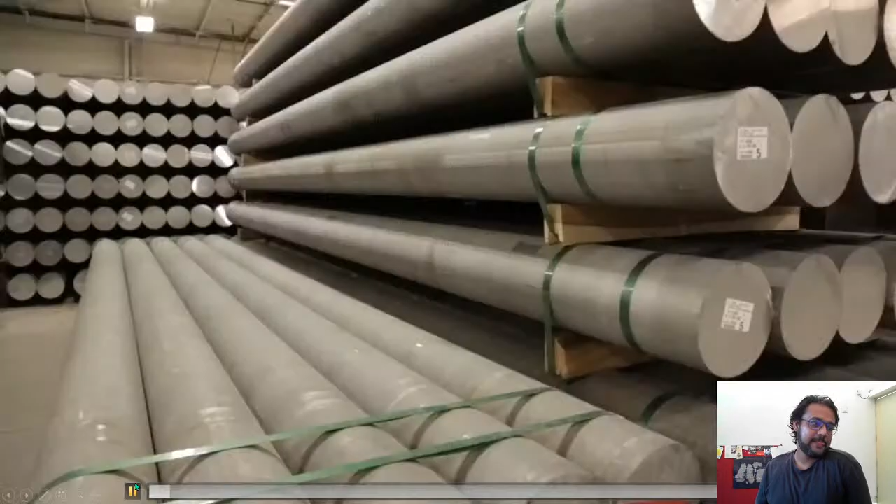The process most likely is something called extrusion. Let's take a look at extrusion. The extrusion process begins with aluminum, and extrusion is a very common process. If you look at aluminum window frames, everything is made out of extrusion. If you've seen a DIY CNC machine, the frame is most likely made with extrusions. These are very versatile, and it's very interesting to see how it's done.

Billet - these logs are 22 feet long and weigh on average 1,200 pounds. Logs are available in 7-inch, 8-inch, and 10-inch diameter, with alloys such as 6063, 6005. So these are different alloy blocks, aluminum blocks. This is like the starting point.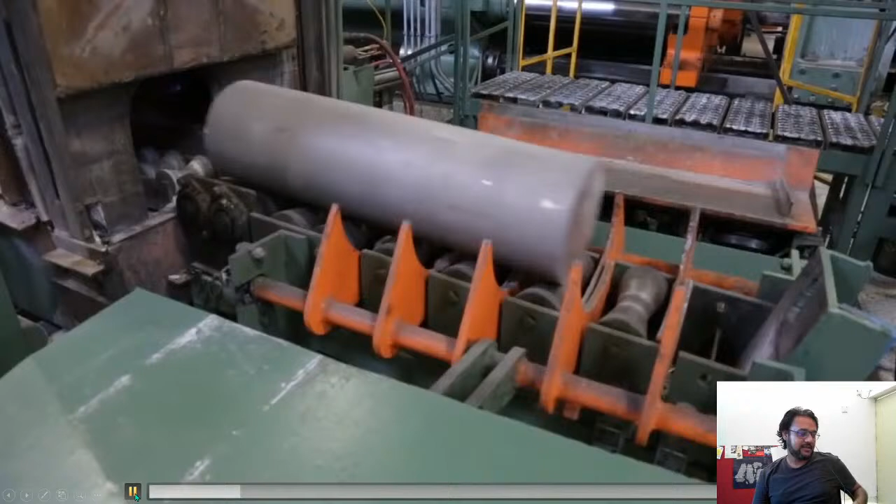6463 and 6061. The log or billet is fed into an oven, which heats the aluminum up to around 900 degrees Fahrenheit. This brings the billet aluminum to a plastic state, where it is malleable under extreme pressures, but not molten. The log exits the oven and is sheared to an extrudable length, usually about 30 inches, depending on the shape being extruded. The hot 30-inch billet is fed to the extrusion presses by the extrusion loader.

So this thing is going to be loaded onto a press, and this is exactly what I was telling you - the process of making bhujia is similar to this.

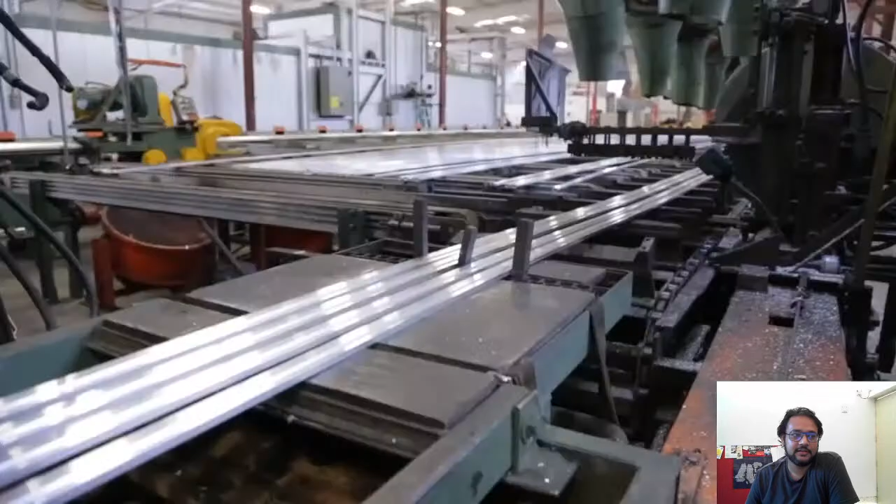The ram then pushes the billet into the container and applies as much as 3,000 tons of pressure, which squeezes the aluminum through the extrusion die. This is what comes out - the material is pressed from the other side, and this is probably the shape of the cavity that is there, and this kind of extrusion comes out, taking the shape of the profile in the steel die and exiting as a long stock length aluminum extrusion.

The entire process is monitored with a digital readout, and all data is stored on servers, which are used to develop extrusion recipes for each specific profile.

As the hot aluminum extrusions exit the press, an extrusion puller grips the end of the extrusions. This is done to ensure there is no warpage as the whole thing extrudes out. It guides the parts along the runout table, which keeps the 900-degree extrusions from twisting and touching each other. On the runout table, a series of fans will cool the parts to room temperature.

So these are fans which instead - let's say in steel it was quenched, but in aluminum's case you don't need to quench it. Here they are not quenching it; rather, they are using fans to cool down the extrusions. You can see these are all the extrusions that have been created.

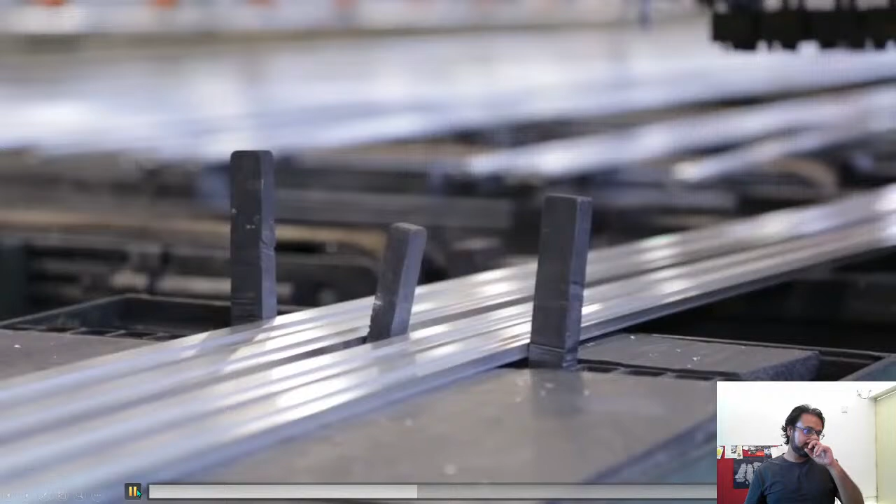At this point in the process, the aluminum extrusions are at a soft state, T4 temper, pre-artificial aging. T4, T3, T6 - these are terminologies that denote what kind of heat treatment processes had been done to the aluminum, what kind of tempering processes they have gone through. Aging is used to reach harder tempers, such as T5 or T6 tempers.

There are other forms of cooling during the extrusion process, such as water quenching, which allow for harder strength tempers through artificial post-aging. Once the aluminum is extruded to the 150-foot table stock length, each piece must be separated from the continuous extrusion process by cutting with special movable hot saws. After separation, the extrusions are transferred to the cooling table, where it is allowed to cool.

As the aluminum extrusions cool, they shrink and distort. After the parts reach room temperature, the next process stretches the aluminum back to its non-distorted condition. So once the aluminum cools down, naturally it will shrink, and you cannot very easily say how it will shrink.

There might be some warpages, some dimensional changes which may happen, as you can see these are very, very long pieces, so some dimensional inaccuracies in the middle may happen. So this kind of process is used to ensure you have a more or less uniform and straight extrusion.

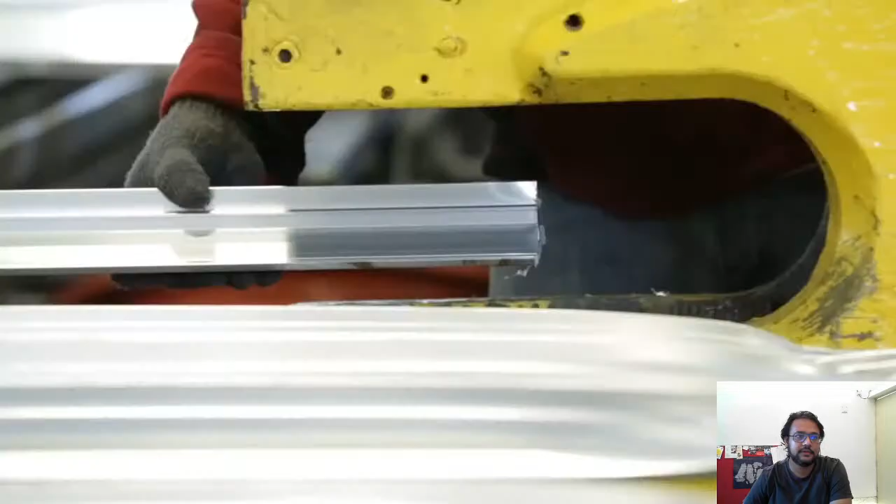The stretching operation is achieved by gripping the extrusion on both ends and stretching the aluminum approximately 3% of its length. This part shows the strength involved - this gripper is exerting a huge amount of force. The cross section you see is solid, so you can have a very high wall thickness part also made from extrusion.

This straightens and brings all dimensions and tolerances into spec. Then the parts travel to the finish saw, which cuts the long table length extrusions into predetermined stock lengths, 20 feet or less. Here you can see this particular extrusion shape.

It has a hole in the center. It is possible to get a hole in the center.

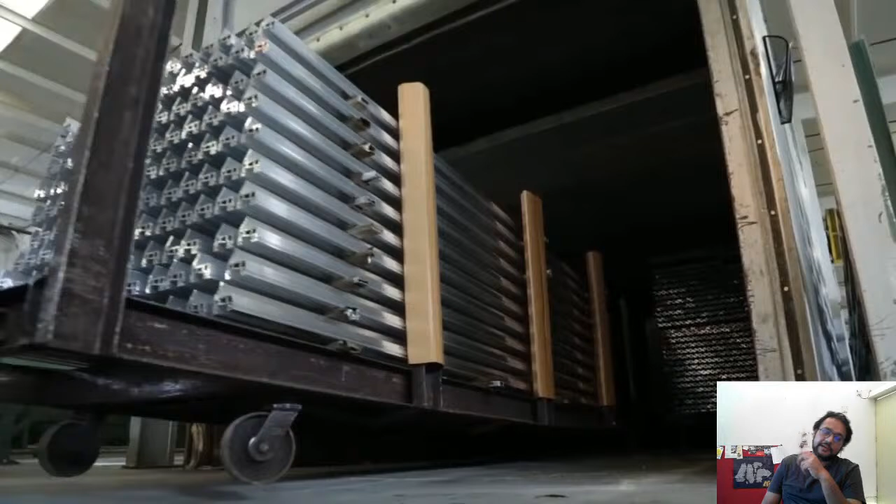Extrusions are then loaded onto aging carts and fed into an artificial age oven, which gives the parts a T5 or T6 temper hardness. The process of heat treatment of aluminum is slightly different, I think much different than other metals - you use a different kind of temperature variation to get it to the right tempering, the right kind of hardness and mechanical properties.

And with a varying number of profile holes - some dies are as large as 15 inches in diameter.

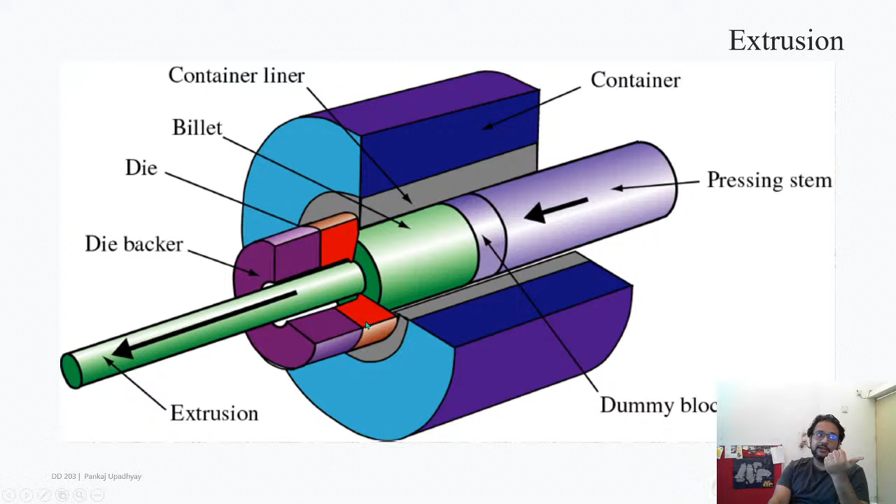You have a few things which are needed. First is a dummy block, which separates the press piston from the billet. The billet is at a high temperature, so directly having it contact the pressing stem is not a good idea, so you have a dummy block there, and then you have the actual die, which you saw being cleaned in the video. Then you have something which presses the die onto the whole setup. Now this setup is ready, and when you press, the extrusion comes out of the other end.

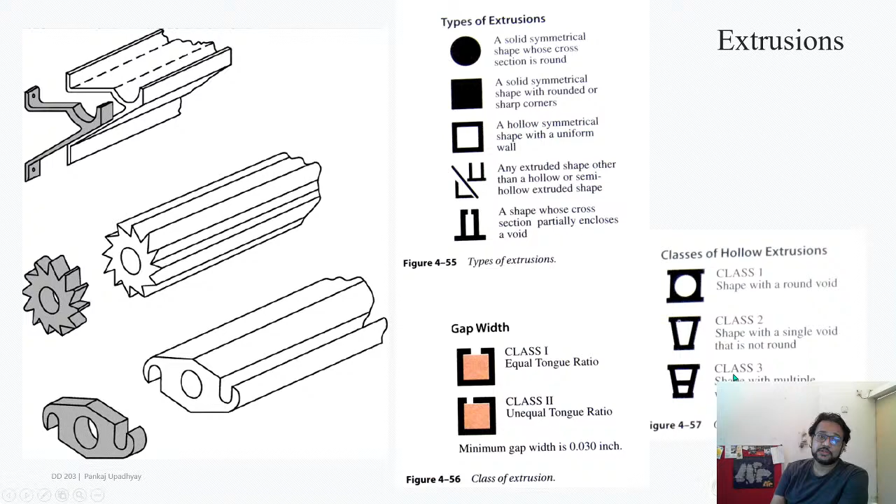And then you can have classes based on the hollow profiles. If you have a simple round hollow void, then it's a class 1. If you have a slightly more complex but probably the same shape as the outer one, it's called a class 2. And if you have more intricate details, multiple holes, then it's called a class 3 extrusion. Okay.

I could not find a video of this. If you find it, please do share. Okay.

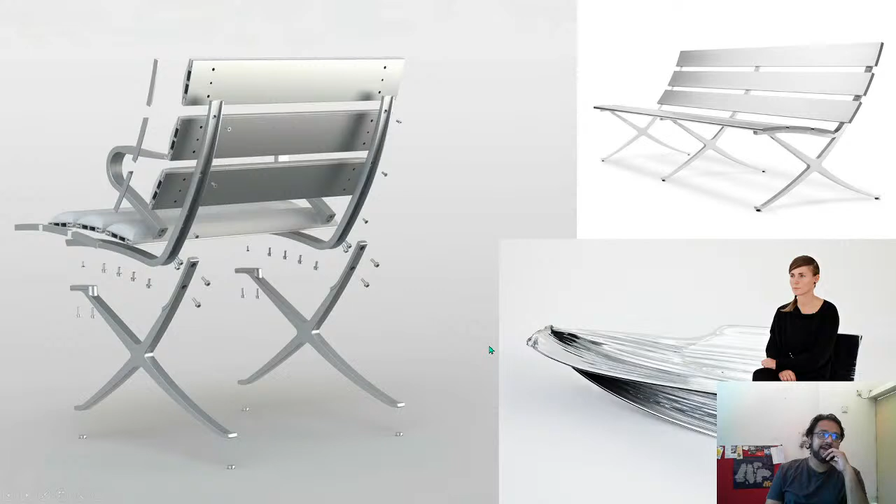And some people have done some really amazing work with extrusion. So this one is an extruded chair, and the uniqueness of this product comes from the fact that you have not the better part of the extrusion, but the ones which are slightly deformed. So it has this unique look and feel to it. So every part is different, right? Let me move myself to the other side so you can see.

So you have this kind of a shape where the initial part of the extrusion is actually the product. And then this is a very nice chair, like an airport seating bench. All these parts that you see are extruded. In fact, these are also extruded and cut into the necessary dimensions, with some machining operations done over here. It's really nice design. Okay, let's go forward.

So how should you design for extrusions? First and foremost, it's always a good idea to have uniform wall thicknesses. This reduces the stresses on the die. This reduces the complications of the die design. And where you can't really have uniform wall thicknesses, you can have ribs instead of such a feature.

Yeah, something like that, Aditya.

Anyway, the other thing is always try to have some fillets. Fillets are essential in almost all manufacturing processes, except for, let's say, machining. And sometimes when you have a very uniform round shape, it may not be easily achievable in extrusion. Rather, you can have relief holes which enable such things. Similarly, avoid very sharp corners with acute angles. These are generic design considerations.

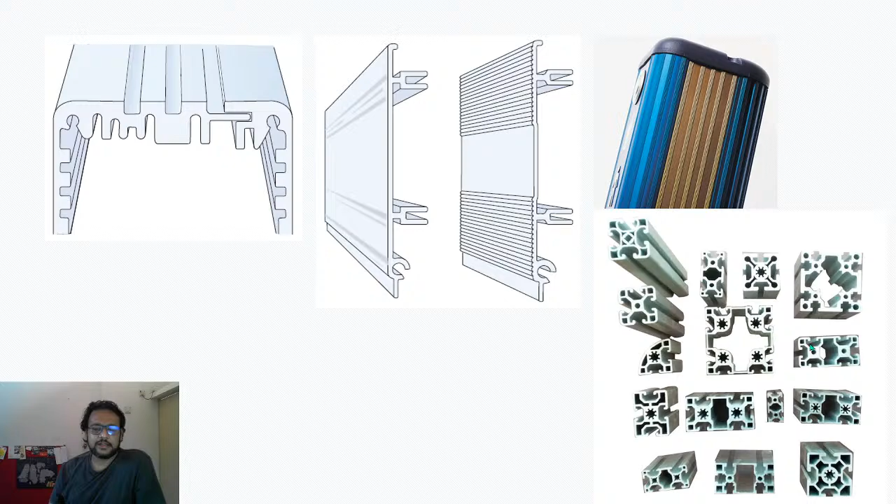Right, so what we will do is we will stop here. We have been going for an hour and 50 minutes, I think. We still have a few topics to discuss, especially some specific types of extrusion processes. Impact extrusion is one which is very interesting, and bending we hadn't discussed. You already explored bending in Fusion, but we'll discuss how things need to be bent.

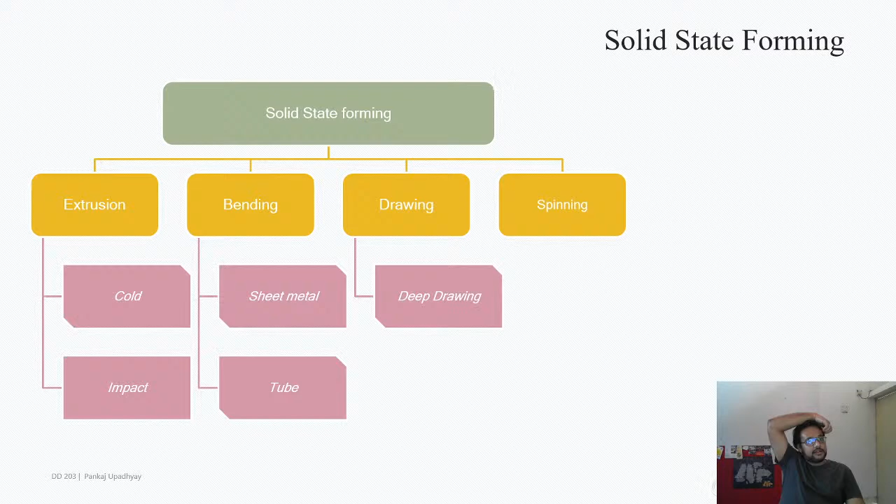And we have the process of drawing and deep drawing, we'll discuss that, and spinning. It won't take much time, but we shouldn't go on for so long. So we'll stop here; these few topics are only 2 or 3 slides, and there are some interesting videos to watch. We'll take a look at all of this in the next class. So that's about it for today's class.